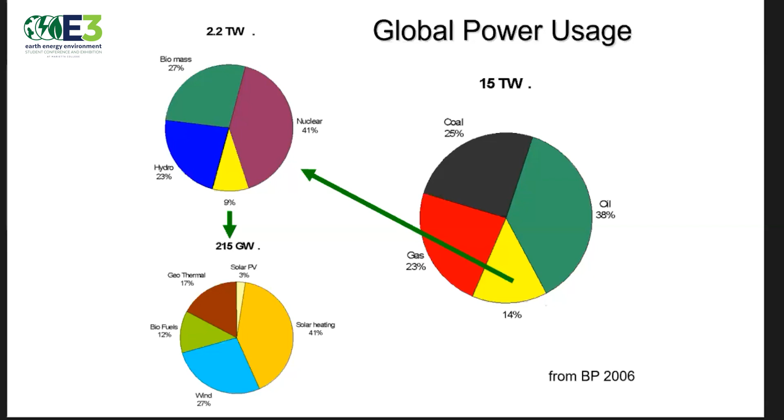Geothermal at the time was 17% of that fraction. Wind was 27%. Solar heating, 41%. Solar photovoltaics, what most people like to think of as solar, was only 3% of 9% of 14% at the time. Biofuels was another 12% of that. Now, updating the global energy mix to 2020, we see that the total fossil share has declined a little bit from 86% to 79%.

Of the non-fossil energy mix, the other renewable has increased to 20% of total global market share. And some good news in this, wind and solar together combined grew from a total of 0.38% of the global mix to 2.18%. So they have both been growing pretty rapidly. Of concern, though, on these graphs, I want to point out that even with this growth in non-combustion renewable energy systems, the share of traditional biomass, firewood, charcoal, dung, grew from 3.7% to 6.8%. These are the dirtiest and most hazardous sources.

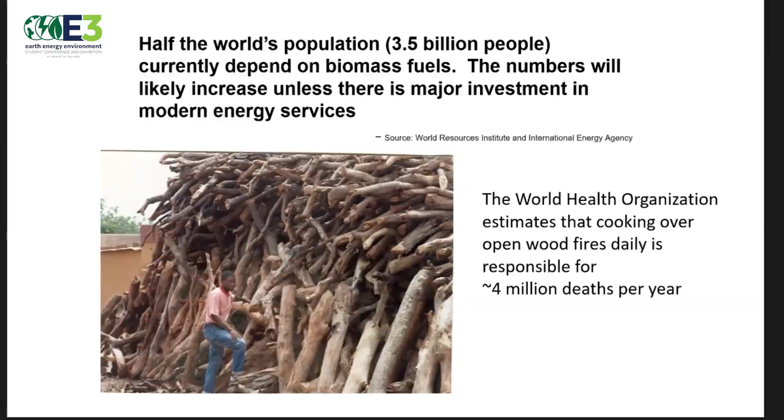So in a number of ways, or at least in this way, I should say, we've moved backwards. Half of the world's population, about 3.5 billion people, currently depends on biomass fuels as their primary energy. The numbers will likely increase. The World Health Organization estimates that cooking over open wood fires daily is responsible for about 4 million deaths per year. And the image is one fuel wood market in the capital city, Ouagadougou, capital of Burkina Faso.

So even with the progress that we've seen lately, we've still got quite a road ahead of us in terms of the change in energy mix. And wind and solar and geothermal are probably the cleanest of the options that we have. And I think that's what we need to look at today and see what their challenges and opportunities are. So I'm going to stop my share and turn it over to Dr. Horne for his background presentation. Thank you.

So let me go ahead then and talk about geothermal in the context, as you've just heard, of the overall mix of renewable energy and actually all energy. So first of all, just a quick snapshot of where the world is in geothermal energy, at least from the point of view of electricity. This is a snapshot from 2020. The figures shown for 2025 are a projection. So in 2020, the world in general was producing about 16,000 megawatts of electricity from geothermal sources.

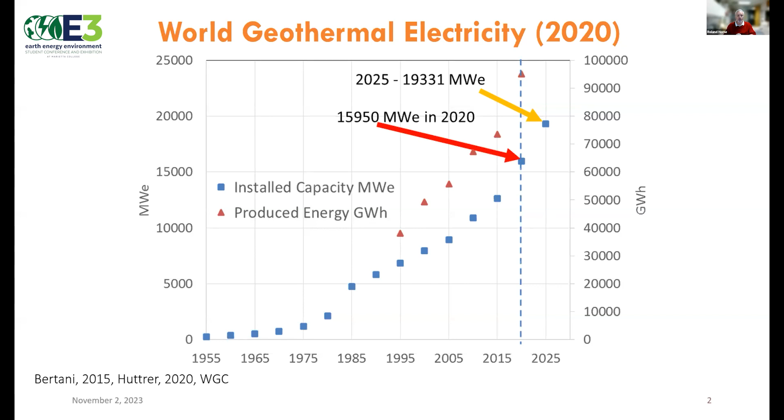And if you want to find out where it's actually being generated regionally, there are two papers from the World Geothermal Congress 2020, which show the updates from 89 countries. There were also updates made in the World Geothermal Congress in 2023. I'm not sure if they're yet online, but they should be very soon, if not now. So we take a look at how the world is growing. I showed you the overall figures, but actually it's quite regional in terms of expansion.

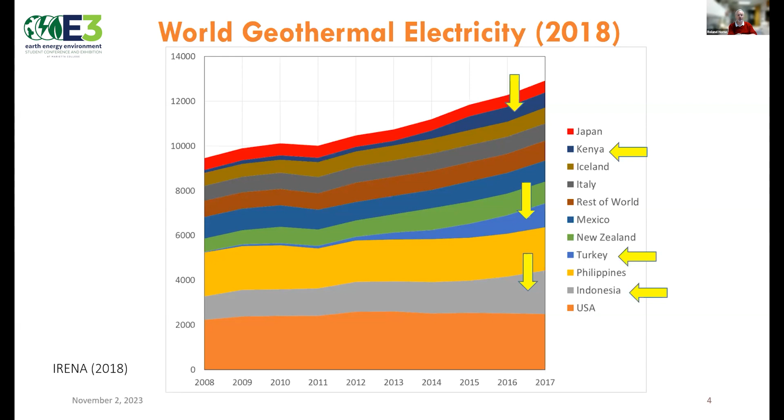And in the last 5 years or so, in particular, there are 3 countries that have made very dramatic increases in their geothermal production, namely Indonesia, Turkey, and Kenya. And importantly, Indonesia used to be number 3 in the world, but in the last 5 years, they overtook the Philippines to become number 2. And you can see there the top 10 led by the United States. And importantly, Turkey, which is now number 4, 10 years ago didn't appear on this list at all.

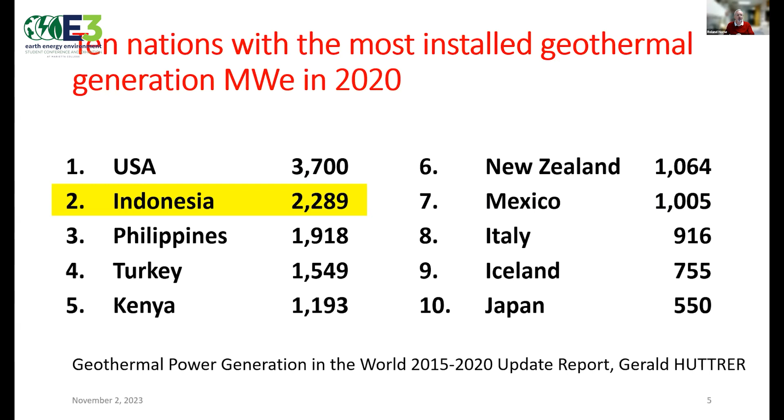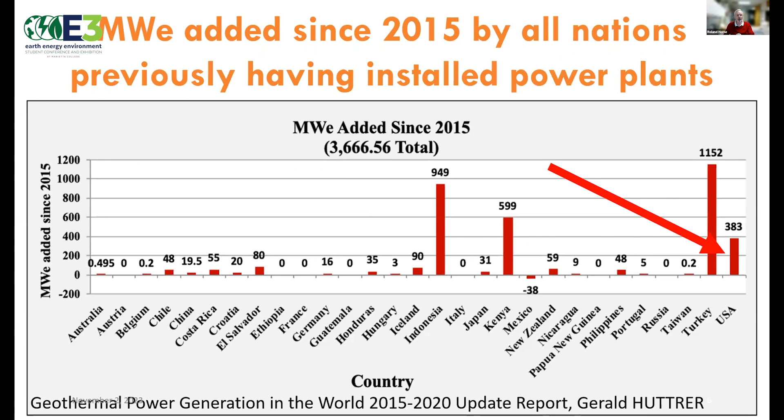And this is a wider list showing all of the nations that have added electricity. So you can see the 3 that I pointed out. But then I've also, being from the United States, pointed out that the US is also continuing to expand, although not at the rate of those other 3 countries.

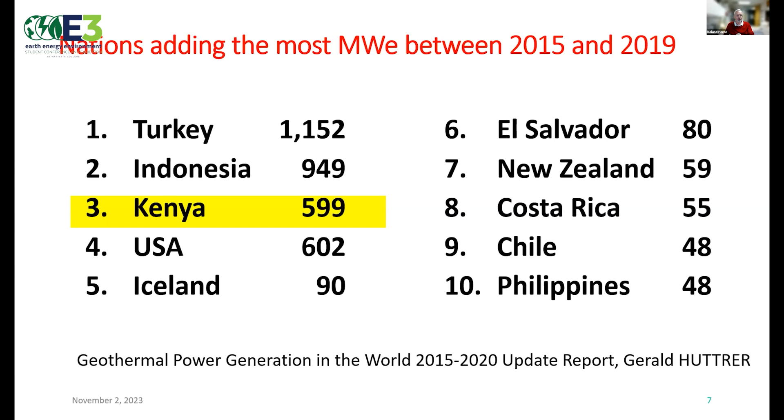And if we look in terms of how much has been added in the countries that did increase between 2015 and 2020, I draw attention to Kenya, which added 600 megawatts. And the reason for focusing on Kenya is that Kenya doesn't have a particularly large national grid, and the addition of 600 megawatts is a substantial fraction of their overall generation.

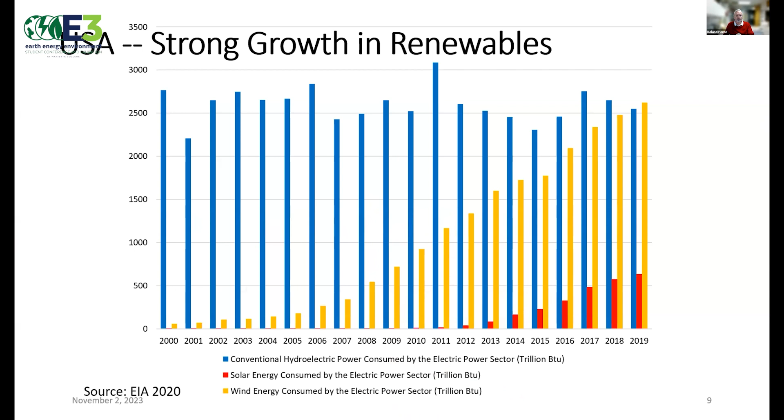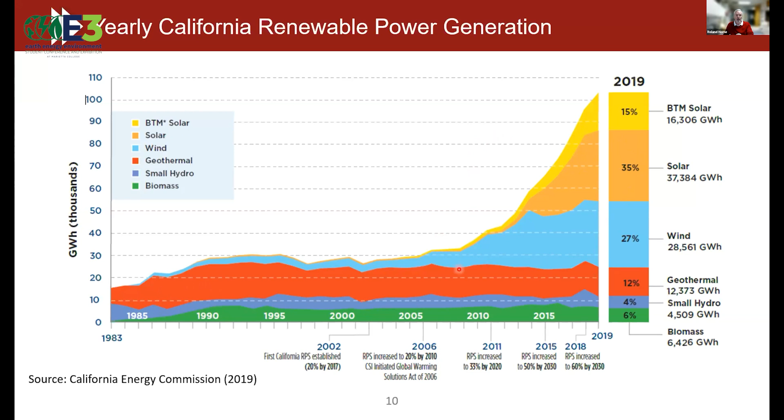And just to be clear here, the solar is divided in two parts here, the yellow and the orange. BTM solar stands for behind the meter solar. So these are individual panels that people have on the tops of their houses that are not grid connected, or at least not supplying to the grid in normal circumstances. The orange is the utility connected solar. So geothermal in the 1990s was the principal source of renewable electricity in the state of California. And it's smaller today as a fraction, but still remains an important component.

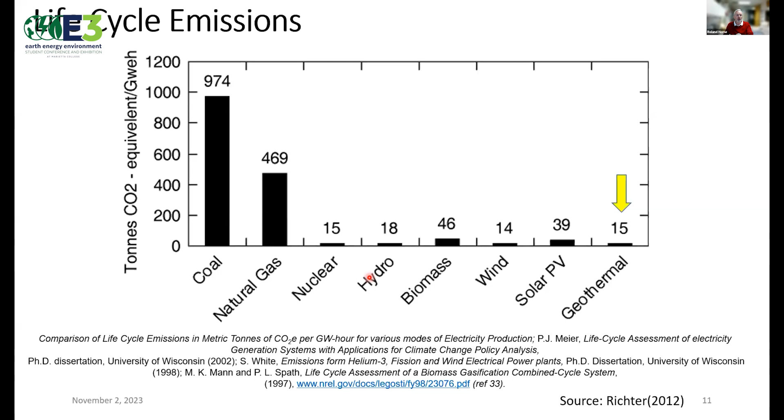And that, of course, as you just heard from Ben, is important because wind, nuclear, and geothermal actually are numerically the smallest carbon emitters in terms of life cycle emissions. So if we focus in a bit on not only California, but Nevada as well, currently geothermal is the source of roughly 6% of all of the electricity generated in the state of California.

And more important still, it's 9.4%, actually it was 9.7% in 2022, in the state of Nevada, our neighboring state. And that's a particularly important number because in the state of Nevada, their geothermal resources are actually rather lower temperature than we have in California. So Nevada, not due to fortunate geology, but a more progressive legislature actually, has promoted the development of geothermal in that state.

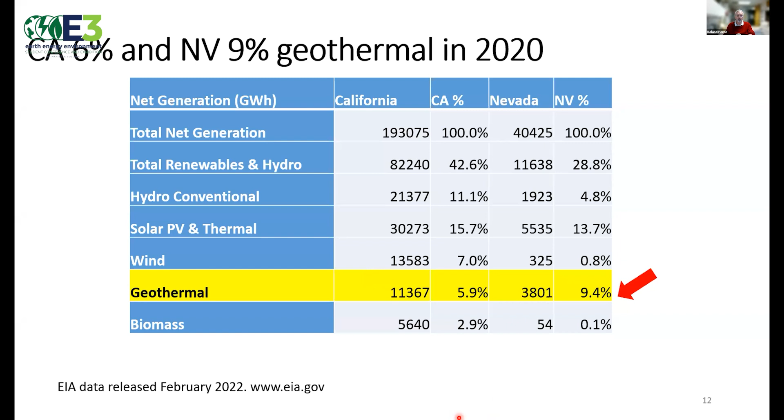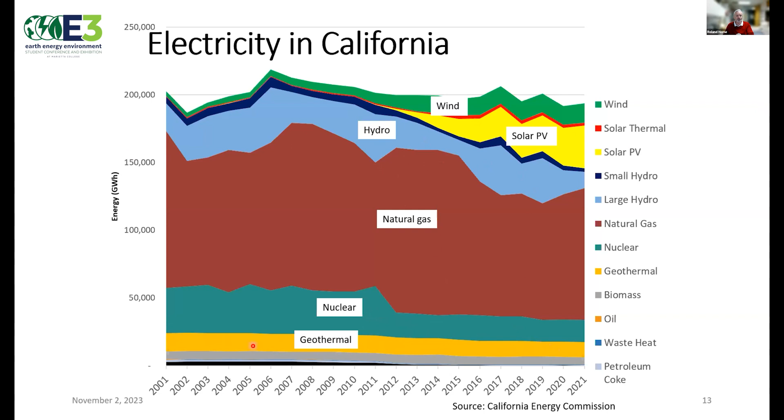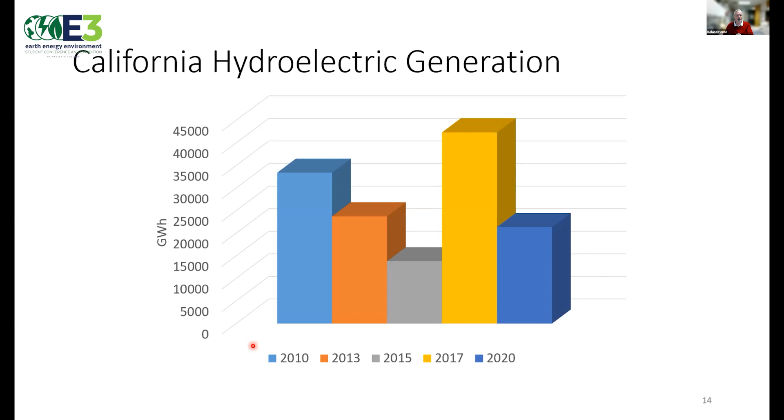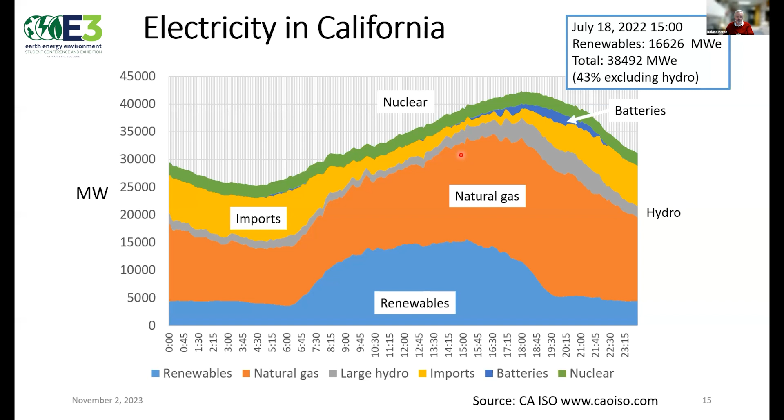And looking at it from a slightly different point of view, you can see then looking at the renewables, it happens, at least on this particular day, and also not uncommonly in California, that the wind blows more at night. Not always, of course, but that's, as you see, a fairly typical pattern on this particular day. That's very advantageous because it backfills what is lost when the solar goes down, when the sun goes down.

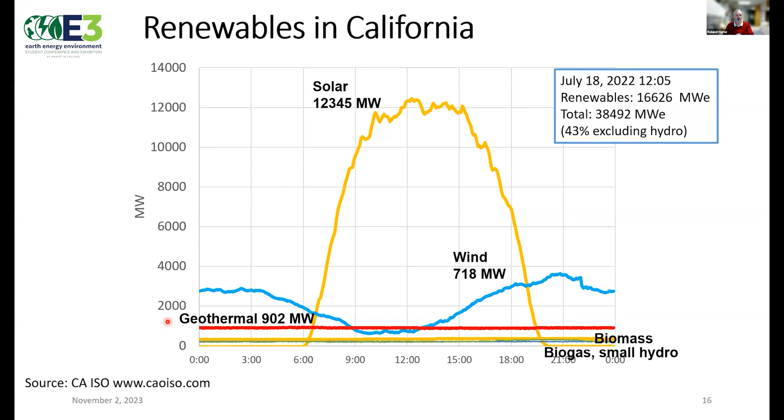But then importantly, what you see at the bottom is this characteristic of geothermal, which remains basically base load all of the day. And this is a point that I want to make, which is a challenge for the future of geothermal, is that in a high variable mix, such as what you see here in California, baseload power is actually not convenient for the grid.

And obviously, geothermal is not particularly convenient from that, because the way that the plants operate and the way that the geothermal reservoirs operate, they actually want to be running all of the time. They're very much like nuclear from that point of view. So the challenge in the future is how to adapt the technology to make geothermal power more easily dispatchable.

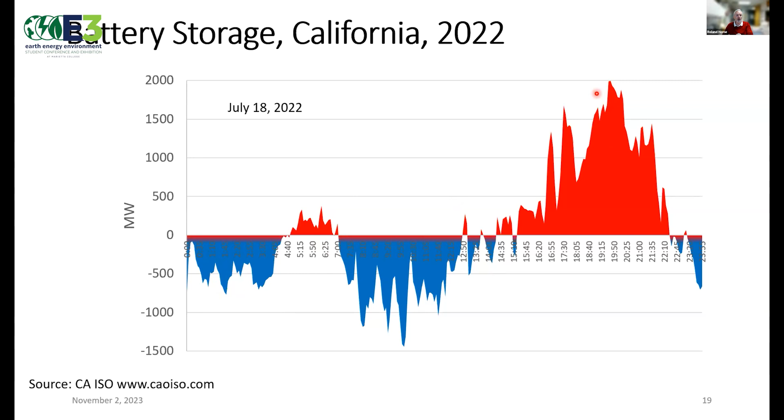So just a summary then. Since 2005, a lot of new countries have joined the geothermal community. There are several countries which importantly increased their geothermal production in a significant way, some of them to the point of achieving nearly 50% of their total electricity requirement. That's been made possible by a lot of new technologies I don't have time to talk about, at least right now. It might come up in the questions.

I talked about lower resource temperatures. Both Turkey and Nevada are examples of places where they were able to recover electricity from lower temperature geologies than formerly was considered to be attractive. And as I pointed out, achieving dispatchability is a new technology target for our industry.

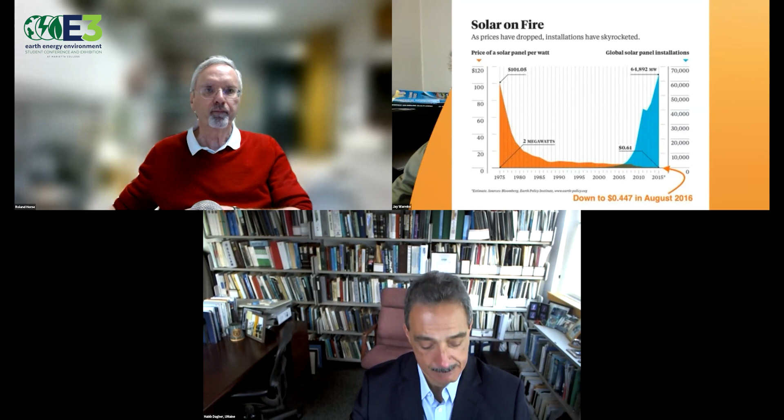So at some point, there's a price point, and we can see from this graph, it was somewhere around 2007 or so, where the costs became attractive and we began to see that growth taking off. The orange there is the cost decline, and the blue is the installation as that grows. And as was pointed out earlier, this was coming from basically almost nothing, a very small amount of solar.

In fact, the prices have declined so much when you talk about solar panels that we're not really talking anymore about price per watt for solar panels. A few years ago, that was the way we measured price declines. Today, we really talk about systems as far as the cost per watt installed. And these costs per watts installed are typically pre-incentive costs. So basically full cost on these systems.

And for retail solar, that price has declined really all the way down in the last couple of years. The average for a retail installation is about $3 a watt. We did see a little bit of a price increase due to some supply chain issues coming in the post-COVID world. So it bumped back up a wee little bit, but now really the first quarter of this year, we're starting to see it stabilize again and come back to a decline.

And I guess I'm pointing out some of these price issues because I think it's important for folks to think about solar not so much like a traditional energy source. I like to think about it like microprocessing, the cost. It almost is more of a Moore's law kind of situation as opposed to something that is an extraction economy where there's a fixed limited amount of this. And of course, the more you extract it, the more expensive it gets.

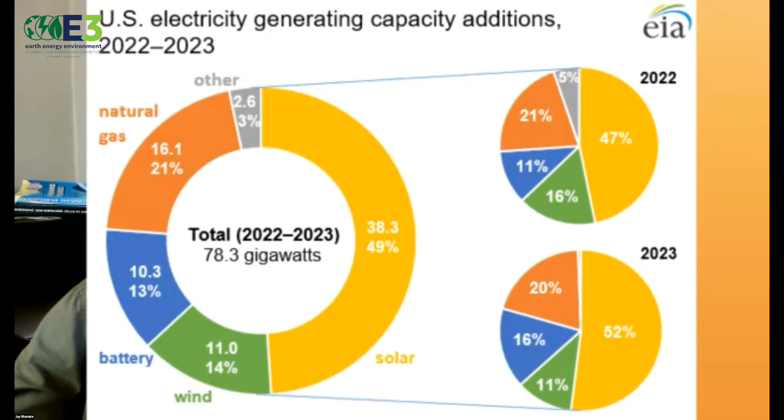But we're beginning now to see that there is a new player in the mix, and that is utility scale battery. And it's becoming a significant portion of new energy sources being placed onto the grid. I'll get into the reason for that in a second, but again, the reason why solar is dominant at the moment for new energy sources comes back to simple economics.

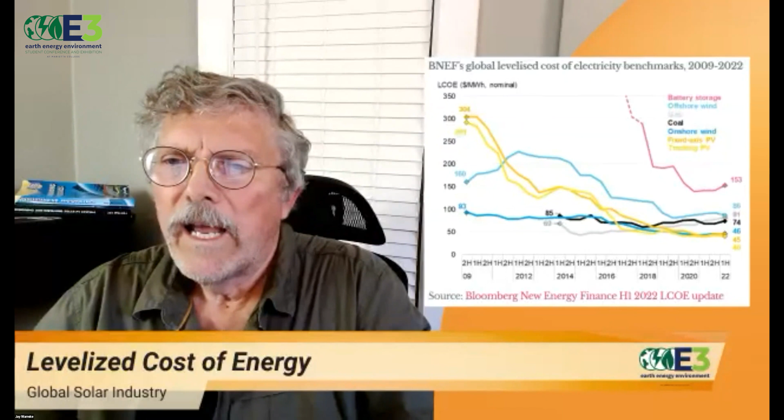If you look at this chart here, the yellow indicates the levelized cost of solar. Then the blue is the levelized cost of wind. And the gray and the black are the levelized cost of coal and natural gas. If we zoom in on this, you'll see that in just the last couple of years, really 2017, the levelized cost of solar fell below that of pretty much all of the other alternatives. Onshore wind is competitive with solar as well.

So those are the two dominant. And in fact, according to FERC, the Federal Energy Regulatory Commission, of all of the applications for new power that's going onto the grid over the next 5 years, 95% of them are wind and solar. So the transition away from fossil fuels as the primary new source of energy has occurred within this country and in most of the industrialized countries in the world.

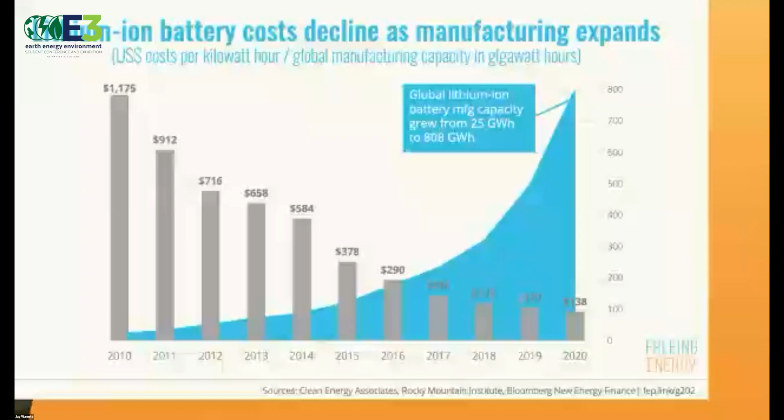But there is still an embedded base of these fossil fuel generating plants, and they're not going away until they're either no longer economically competitive with the alternative, or they reach their sell-by date, basically. And of course, lithium prices have again created this dramatic rise in battery storage technology. So what we're seeing is that at utility scale and at the individual homeowner, they can deal with the intermittency of solar and wind by simply storing it when they have it and using it when they don't have those energy sources.

And the price decline there with lithium has shown that same kind of curve that we saw with solar, where as prices decline over time, you reach a tipping point, and it appears to me anyway from this diagram, that's around 2016, where the prices became competitive enough that the adoption of that technology really takes off. And we're going to see this same kind of exponential growth within battery storage that we've seen over the last 6 or 7 years with solar energy.

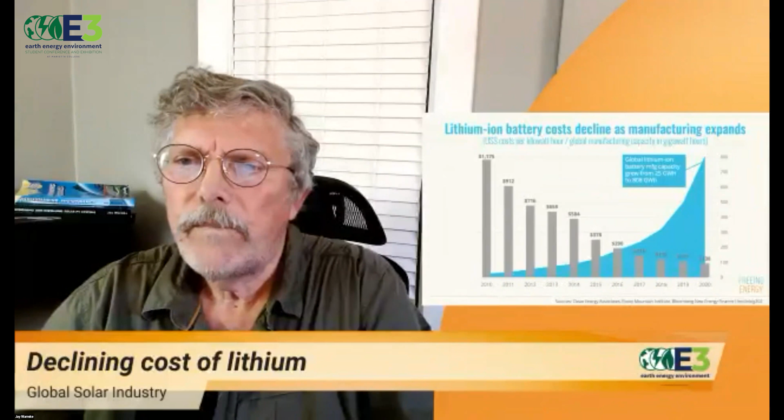And I guess we need to lay on top of this. I've been talking about electricity for the most part, but we're also undergoing this dramatic change worldwide, moving towards the electrification of pretty much everything. The electrification of vehicles, that is going to have a significant impact on the petroleum industry that has been the dominant fuel source in that market share.

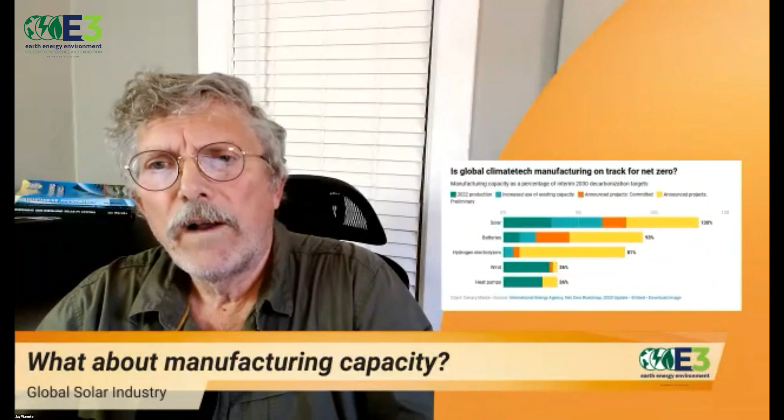I like to think of energy usage a lot of times as a third of it is buildings and structures. That's primarily electricity. A third of it, industry, primarily has been natural gas, and then transportation. So that's primarily been petroleum. All of these are rather rapidly moving towards electricity, the electrification of everything. So we'll have to see how that plays out. And one question that is often raised is, is there the manufacturing capacity to deal with this rapid transition from where we've been to where we're going?

And there was a recent study just this week that was published that shows that they are anticipating, based on the announced projects, that actually solar is in pretty good shape as far as manufacturing capacity. This was a study done by the IEA, and it's saying that in order to get to net zero carbon emissions by 2050, we have some interim goals on manufacturing capacity by 2030. So where do these industries stand in meeting those interim goals for production of the components that are going to be necessary to make this happen.

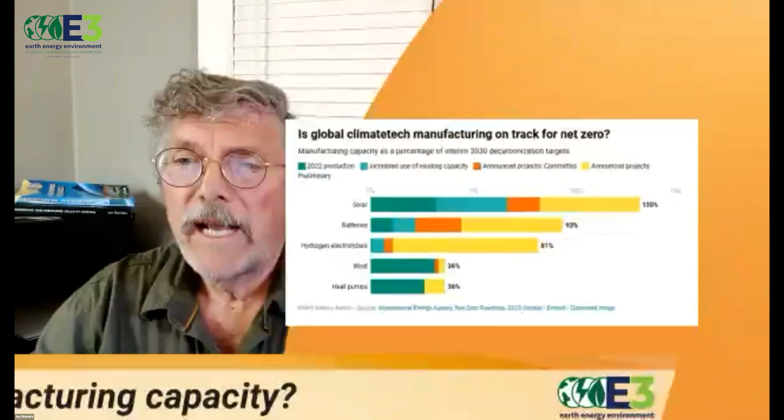And solar is already at 130% of what it anticipates it needs. Of course, some of these are simply announced projects, and we'll see if they're actually built. Battery technology also in pretty good shape. Hydrogen, I'm not very keen on hydrogen, and it's probably a very small number. But then wind and heat pumps, as was mentioned earlier, looks like there's going to be some manufacturing capacity issues. So that's going to have to ramp up pretty rapidly to deal with it.

So what countries are dominating? I think we'll keep hearing China. China dominates in many aspects of solar and energy, geothermal, as we just heard. One of the interesting changes here domestically has been that the United States, up until really last year, relied upon Chinese manufactured solar products, primarily the solar panels. About 85% of all of the panels used in the US were manufactured through Chinese firms.

They moved them through a couple of countries in Southeast Asia to avoid some tariffs, but that hasn't worked very well. And so anyway, tax policies just recently have changed that, where with the Inflation Reduction Act, there are so many manufacturing facilities being announced in the United States that it is anticipated now that about 90% of all of the domestic need will be filled from domestically manufactured solar panels within just 3 years.

So that transition has gone from being import dependent to being domestically provided in a period of about 3 to 4 years, which is pretty dramatic. And the United States, that model is being emulated in Europe, in many of the other nations. So I suspect we're going to see this where there's a rush towards domestic manufacture of these critical components, not only in energy, but in microchips and things like that.

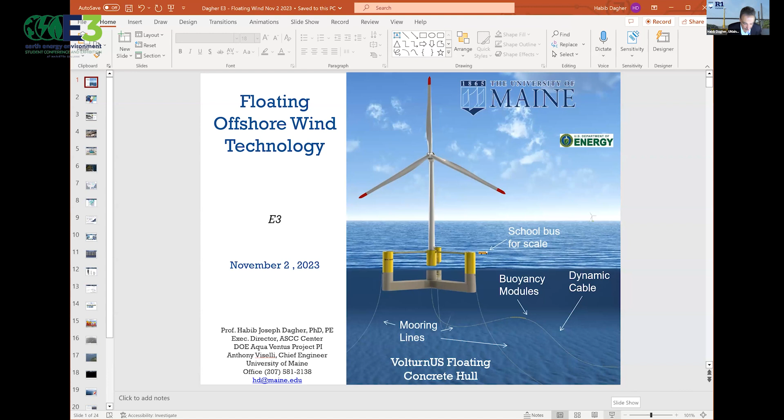Very good. Let me preface this by saying that society needs all of the above in many ways. I think solar and wind and geothermal and hydro and other renewable sources are key for us to combat climate change and be able to have a cost-effective system. And I'd like to preface also that depending on where you are in the world, you may have more abundance of one source than the other. So geographic location can also determine in many ways what you use and what you don't use.

I'm going to focus, because that's what we do at the University of Maine, on talking to you about floating offshore wind technology, which is the next generation offshore wind. Of course, there's a lot of land-based wind out there, but many of us who live in coastal areas and coastal states have a wonderful resource closer to our big cities than land-based wind. If you're also constrained geographically, such as in New York or in Massachusetts, in Boston, and other places, offshore wind is the wind that you have access to closer to the population and the loads that you need to serve.

Offshore wind is not as big as land-based wind right now. The majority of installations in the world are land-based wind installations, but offshore wind is moving forward at a rapid pace. And one of the key technologies within offshore wind is floating wind technologies. You go to floating turbines if you have water depth more than about 50 meters. And that represents about 2/3 of the offshore wind resource across the globe. So it's an important resource, and there's an international race right now to develop floating wind technologies.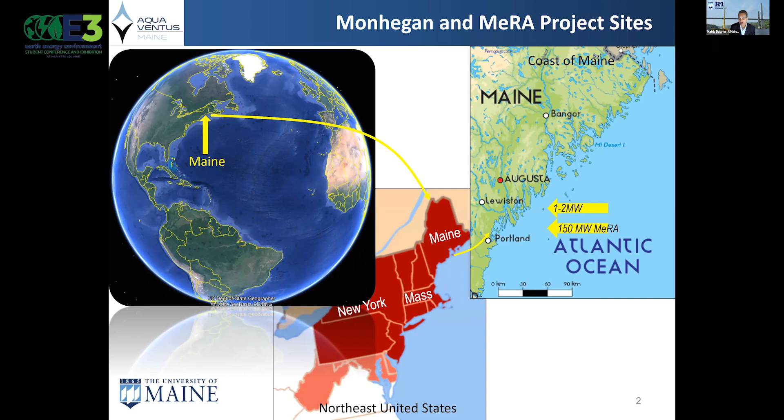We have 2 ongoing projects this decade on floating wind. One will go off Monhegan Island, Maine; that's a single turbine. And then a bigger research array is going to go off the coast of Maine at the end of the decade, a 150 megawatt unit.

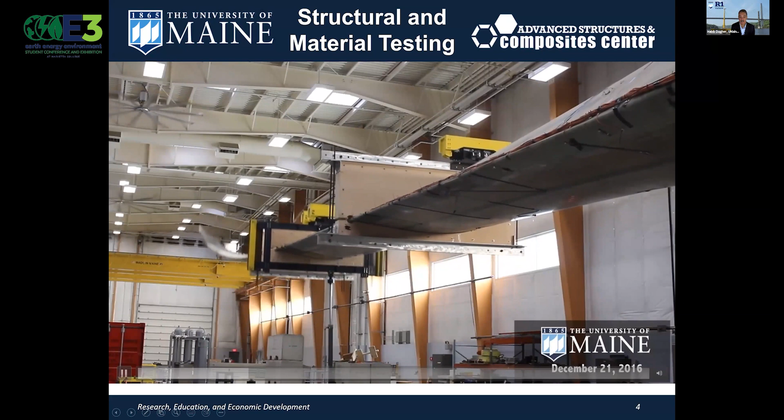This is our research center, and to give you a sense of how we research offshore wind and wind energy, this is an example of one of our test facilities at the university. This is a wind blade that's being tested under fatigue loads. As we're building and designing bigger and bigger turbines, the fatigue performance of these turbines is very important. You can actually test the fatigue performance in a test like that within 2 months and replicate 20 to 30 years of service.

We also have built facilities. We call it the wind wave basin. It's a facility that has a wave basin and a wind tunnel on top of one another, and that's the first facility in the U.S. of its kind that we built to basically help develop offshore wind turbine technologies. In this case, we can create windstorms over wave storms.

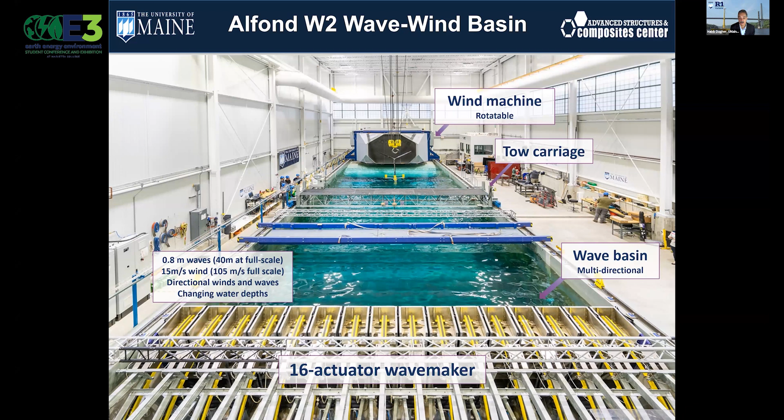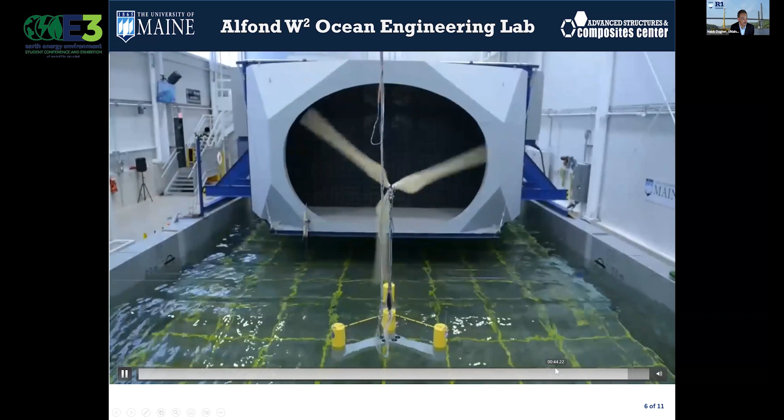Here's an example of the facilities that we've been building to develop floating wind turbine technologies. You can see here we can create waves of different frequencies, and in the background a wind tunnel that allows us to create wind shear, change wind speeds with height, and change wind direction versus waves and so on. What you see right here is a floating turbine being tested under combinations of winds and waves. That's an example of the kind of tests we do to move this technology forward globally.

Now, going back to the U.S. briefly, if you look around the U.S. coast, the statistic that is really interesting and important is that there's enough offshore wind capacity within 50 miles of the U.S. coast to power the country 4 times over. And about 80% of our population lives in coastal states. So this is an example of a resource that sits next to major cities on the coast of the country, and that can be part of the solution towards the future. Not the only solution, but certainly part of the solution.

What you see in light blue and dark blue are shallow water areas and deep water areas. The light blue areas are shallow water.

Can you see my cursor at all? I don't know if you can. Yes, I can.

Thanks. So the shallow water areas are light blue, and what you see in dark blue are water depths of 50 meters or more. Anytime you see dark blue areas, you have to float the turbines because it's too deep to fix the turbine to the seabed. So in the U.S., 2/3 of the offshore wind resource is in deep water where you need floating turbines.

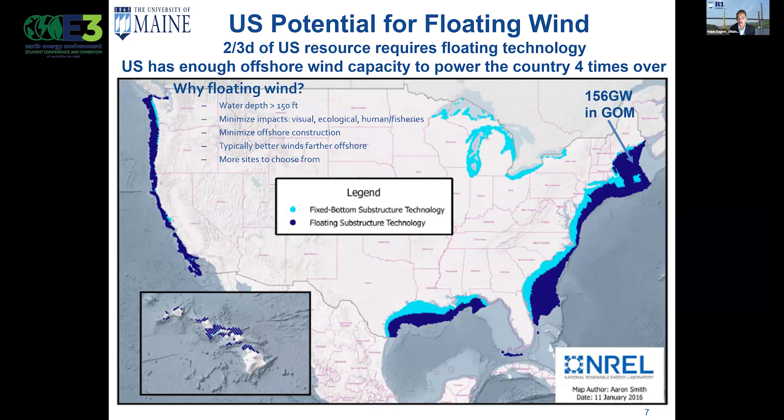The U.S. government last year called floating wind the 5th U.S. Earth shot. In other words, a key technology to meet our climate goals and our energy security goals. That doesn't mean that solar isn't important or hydro or geothermal isn't important. It's just one of the many solutions that society has to help solve its energy and climate issues.

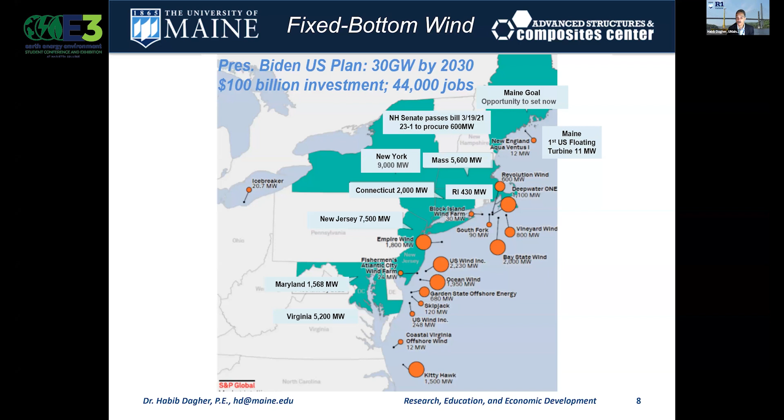This is a shot of the east coast of the United States showing where offshore wind farms plan to be built. The U.S. government has a goal of 30 gigawatts of offshore wind by 2030, which will bring roughly $100 billion of investment into the country and 44,000 jobs. I would say all of them right now are on the East Coast, but the West Coast is going to start soon going to floating turbines because the West Coast is all in deep waters.

There are different ways to float a turbine, and there's an international race, if you wish, to develop different technologies. As far as I know, there's more than 80 technologies out there. You could see different designs of floating turbines, but typically they all share one thing: they float. You fabricate them dockside or tow them out to sea and moor them to the seabed. And there's different ways to design them and to moor them.

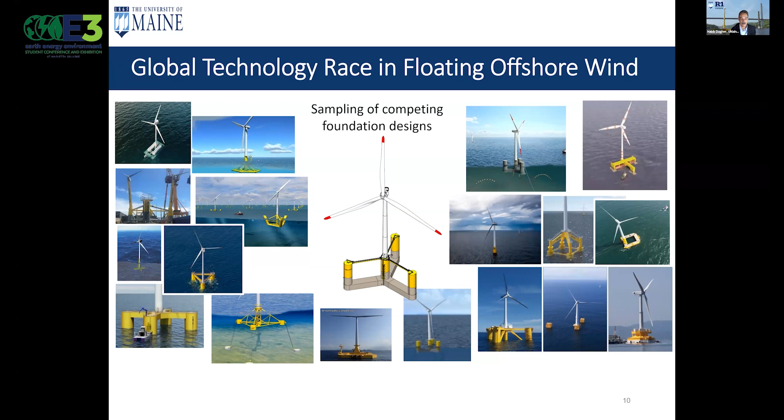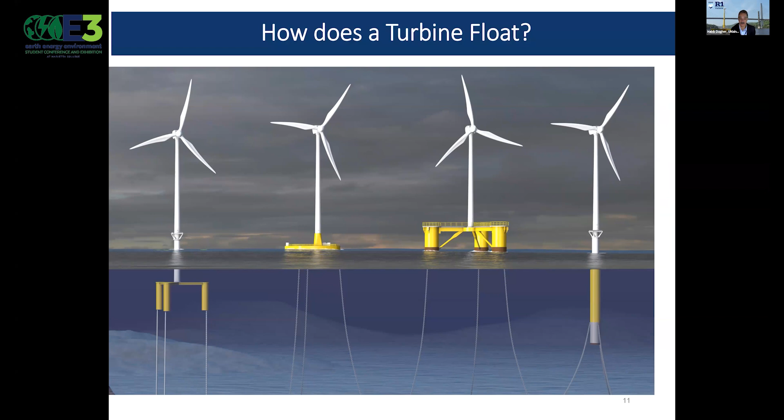But what's interesting is the technologies have been borrowed from the oil and gas industry. Oil and gas platform designs have been converted to hold up floating wind turbines. And these are different designs of floating turbines that you could see out there. How do you moor them to the seabed? You use mooring lines, and they're typically made out of steel chains or out of synthetic mooring ropes. But notice these are not tiny. These are very big steel chain sections and very big rope sections.

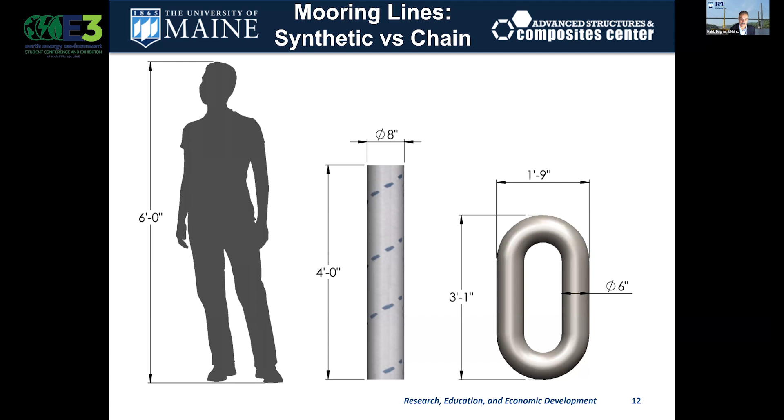The other thing is how do you connect an offshore wind farm electrically to the coast? Each turbine that floats has a cable coming down from it, and typically it forms this lazy S wave with buoyancy modules on it to allow the electrical cable to follow the hull as it moves around. Of course, it doesn't move around as far as it wants. It moves around roughly in a watch circle that might be anywhere from 20 to 40 meters in radius. And so the cable has to follow it as it moves around.

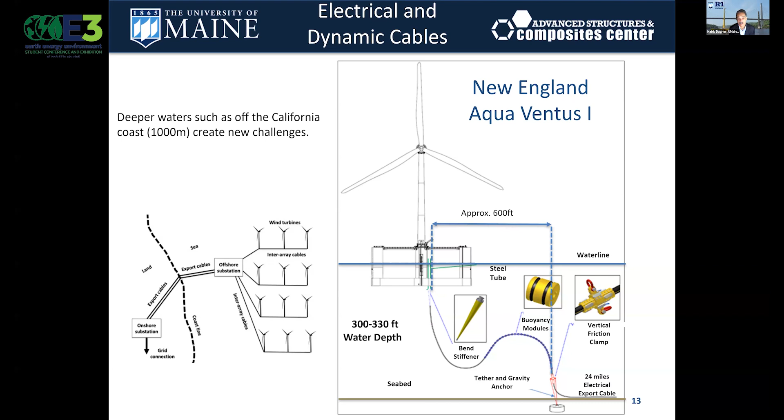But eventually, to bring the power to shore, you have arrays of turbines, typically 3, 4, 5, or 10 back to back, about a mile apart. And each turbine will have a cable coming out of it, and they're basically daisy chains. And eventually each row of turbines has a cable coming from it to an offshore substation, and then you bring an export cable back to shore. And it's typically buried under the seabed. So the cables between the turbines are called inter-array cables, and the cables that connect a complete farm to shore are called export cables. And the farms have been built over 20, 30 miles offshore, depending on where you are around the world.

And finally, here in Maine, we have a plan to bring floating wind to the state and beyond. The plan is, we call it 1-10-100. In other words, crawl before you walk, walk before you run. So we put one turbine in the water 10 years ago, and we're going to put 2 more by 2026, and then 10 more between 2029 and 2030. And then starting the next decade, we go to gigawatt-scale commercial farms.

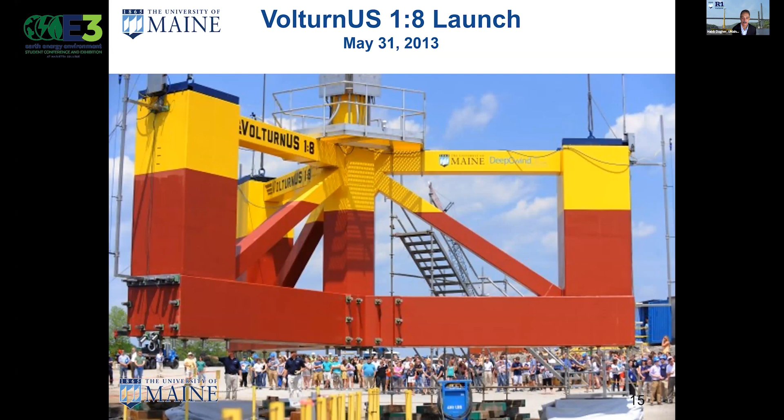This is the very first grid-connected offshore wind turbine in the U.S. We built it in our laboratory. It was a 1:8 scale version of a larger unit. You could see what it looks like. It was all fabricated onshore in pieces, assembled, and towed down, in this case, the Penobscot River in Maine. It was a 10-hour-long tow. You could see the hull completely assembled. When it got to its final position, it was moored to the seabed. The mooring lines were pre-installed. We had a pre-installed electrical cable that we hooked up, and that's how we ran the unit.

So there are a number of opportunities with floating wind across the globe. As we said, 80% of the U.S. population lives in coastal states. Offshore wind is very close to the large population centers, large and big cities, off the U.S. and the world coast. So we see offshore wind, floating wind, to be an important part of the solution going towards the future.